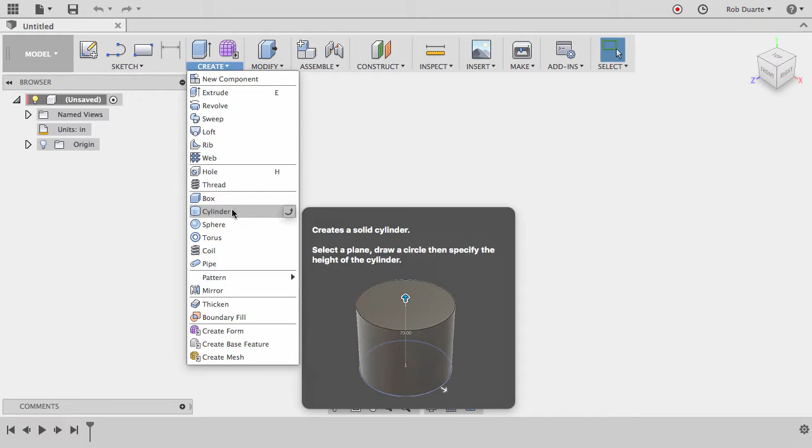So, I think what they were looking for was to see something in here that would create something like a hex rod or hex cylinder. There isn't such a thing, but we would do that using a sketch. So I'll click create sketch here and choose the top work plane. And then there's a command here for creating a circumscribed polygon. So I'll make this polygon 3 inches and I'll hit OK.

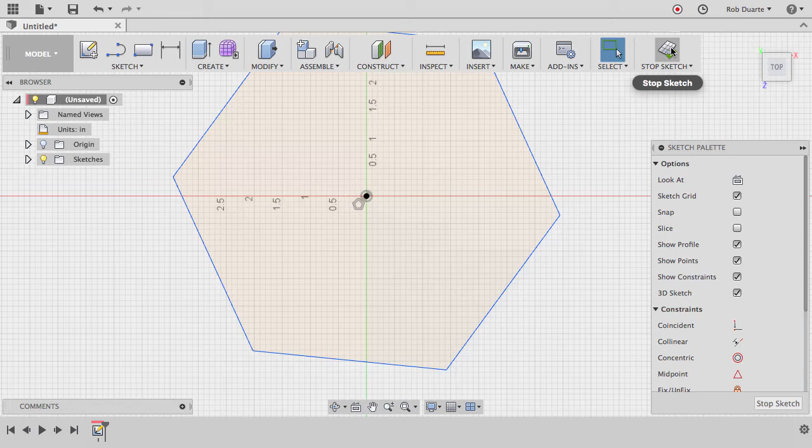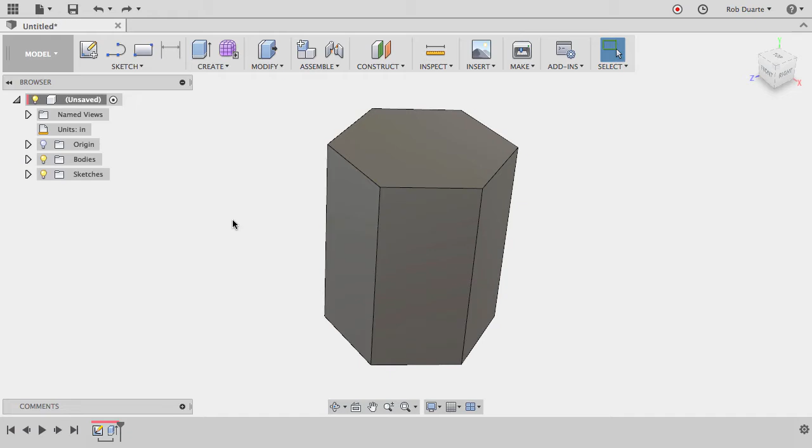And then stop sketch. So at this point, I could just click on it and use either press pull or extrude to pull this up to, let's say, 6 inches or 8 inches. But at this point, there's not a lot I can do. You would think that I might be able to use the move command. I'll hit M and then just choose this face and rotate it, but that doesn't seem to do what we want. So I'll undo. You see it added a move command here, but I'll undo with Command Z. And instead of doing the extrude, I'll undo again.

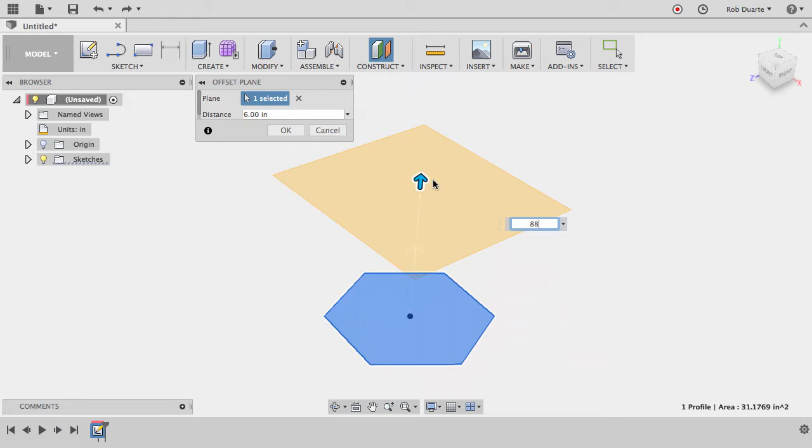And what I'll do is create a second polygon up above and use the loft feature to bridge the gap between those two profiles. So first thing I'll do is create a construction plane and lift it up 8 inches off of that original one. And then I'll create a new sketch on this surface. And I'll use that same circumscribed polygon command. And I'll just make another one that's slightly bigger. So now I've got two here, one above the other.

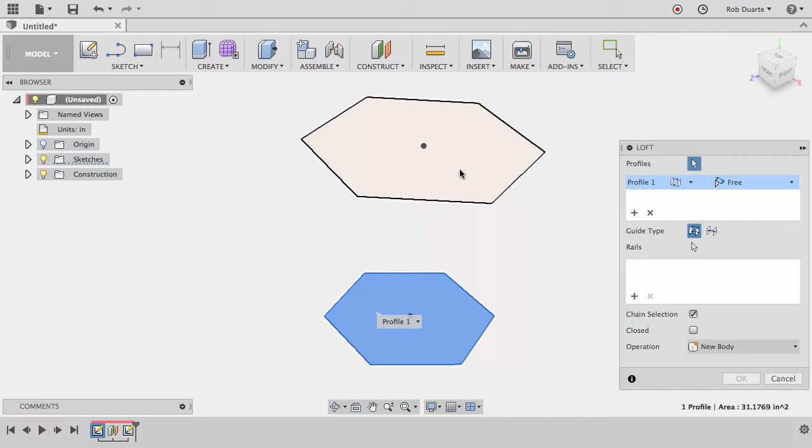The next thing I want to do is try that loft command. So I'll create loft and just tell it I want to go from that profile to that one. And you can see it worked. And in fact, if I edit that top sketch and kind of twist it a little bit, we should see that there's a twist in it now. Instead of going back and editing that sketch blindly, I can't see what effect it's having when I go back in there.

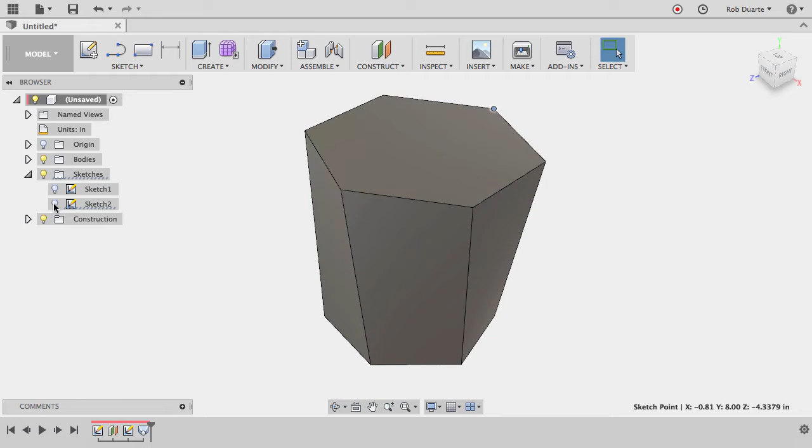Because I'm going back in time before the loft, what I can do is turn on that sketch here and right click on it and choose show dimension. And that way I can actually edit the sketch right from outside of the sketch. So I'm kind of changing its size. I can also twist it. And so this seems to work, except when it gets to a certain point, it doesn't keep twisting. It just kind of is more efficient than that, tries to find the nearest edge. So this doesn't quite work unless you only wanted a slight twist.

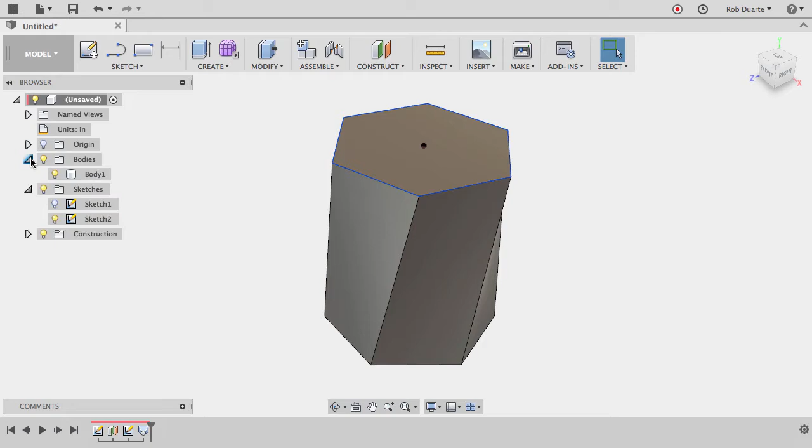So let's go back and try and figure out how we can do this. I'll hide this body for the moment and make sure the sketches are on. And what I'd like to do is use the loft feature, that loft command that we used before, but I also want some rails so that there's a specific relationship between this point here and this point here. And the way that I do that is by creating lines between them.

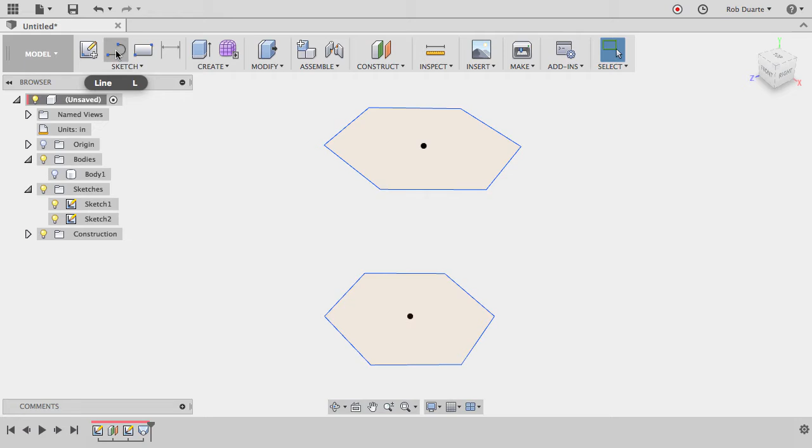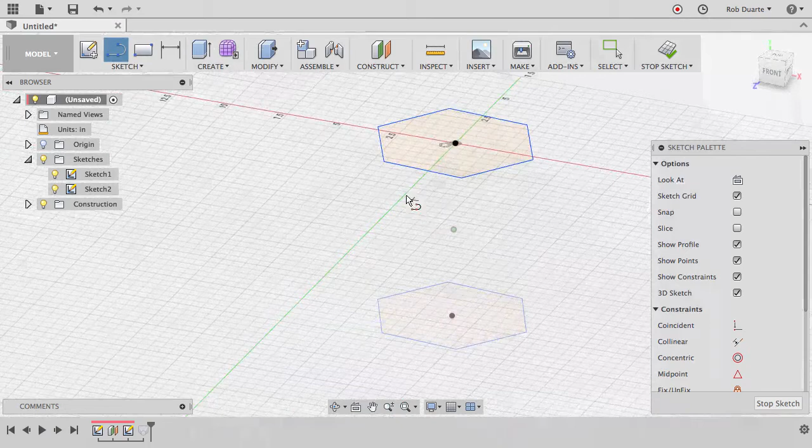I'll choose the line command, and it needs to be within a sketch, and I'll actually put it in this same sketch. I'll click here, and as long as you have in your preferences this feature called Allow 3D Sketching of Lines and Splines, this will work fine. So I'm actually leaving that kind of two-dimensional view of the sketch by just rotating around, and what I'll do is create lines from this point to this point, this point to this point, and so on.

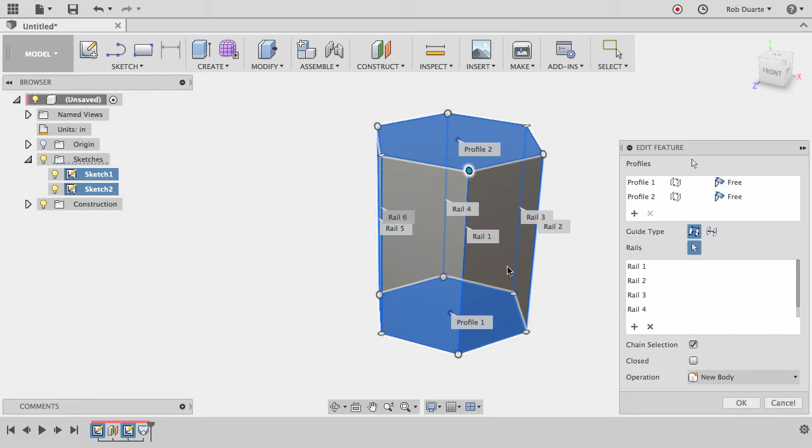Now I can stop the sketch and edit that loft command by double clicking on it, and now I can choose to add some rails. So I'll click on each of those rails. There's the first one, second one, third, fourth, fifth, and sixth. I'll choose OK. And now what we can see is I turn that body back on. As I rotate this top polygon, it's able to keep twisting. Okay, so let's say I've got the twist I want.

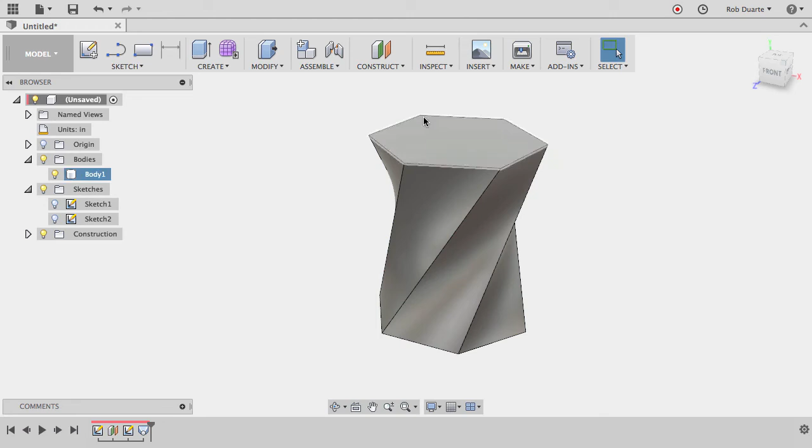I guess the last step would be, because this person who asked the question is a new user, I'll continue to actually make this a vase, which would be to use the modify shell command. And if I just click on that top face, I can say the thickness that I'd like it to be, maybe 0.125 inches, and I'll hit OK, and now I've got a vase. It's open on the top and closed on the bottom.

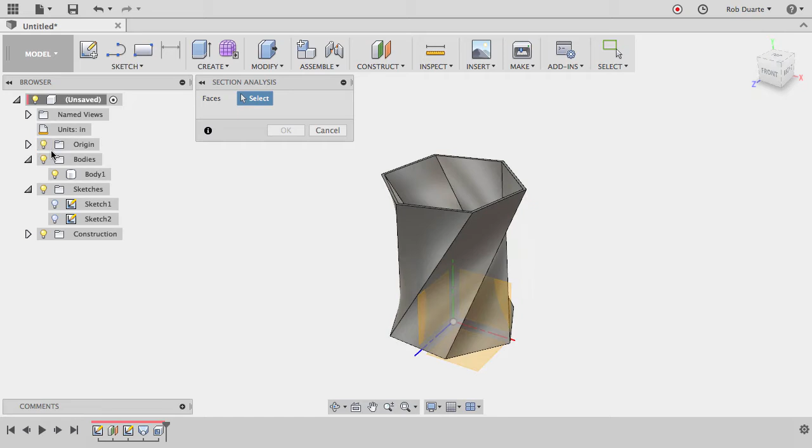I can use the inspect section analysis command, and I'll turn on the origin just so I can select a face here. And then when I hit OK, you can see that it's actually made a hollow vase-like thing.

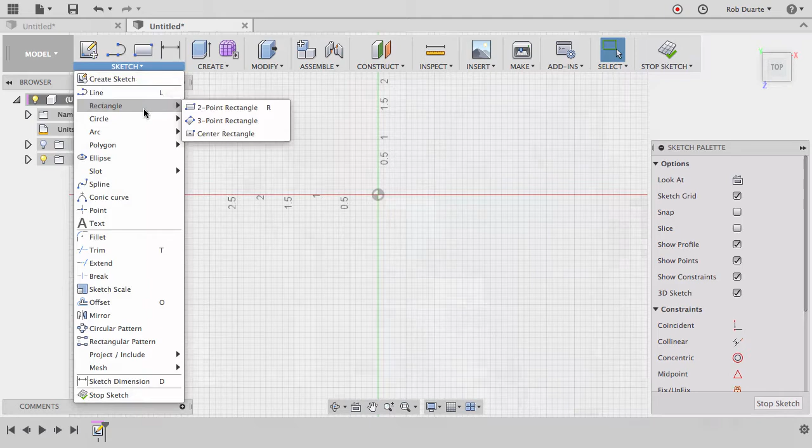Okay, so I've created a new design, and I'm just going to show you how that same thing might happen using the sculpt mode, sculpt workspace. So again, I'll create a polygon in a sketch, and again make that like 3 inches and hit stop sketch.

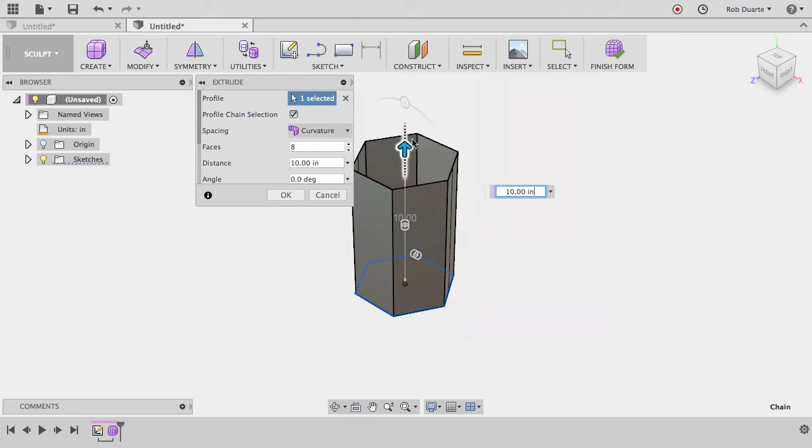Now I'll go into sculpt mode, which I can do by choosing create form here, and I'll extrude in sculpt mode. So if I choose this set of edges and make it go up whatever dimension I want. Let's say it's 10 inches this time, and then hit OK.

You'll see what I've got is basically a similar sort of shape, but it's not actually a solid body. You can see it's a sculpt body here, which is just a bunch of surfaces. I can make it a solid body afterwards, so for now we're working just with surfaces.

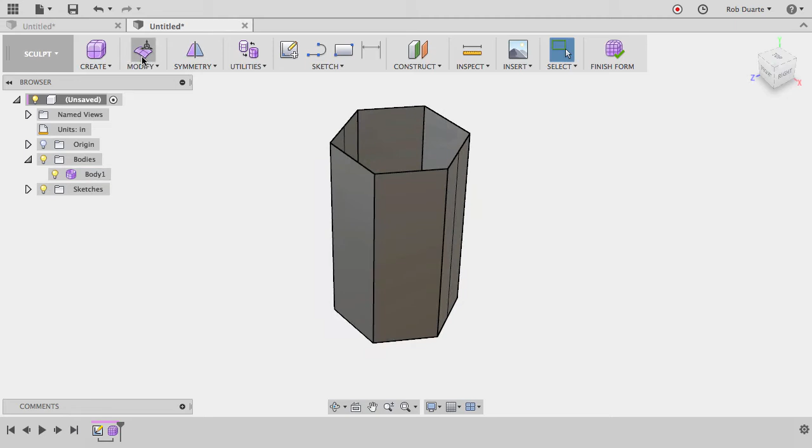So I'll choose edit form here, and what you'll see is that I can actually double click on this edge, as long as we've got edges as our selection filter, and then just twist it. So this works too. And it's twisting in a certain way.

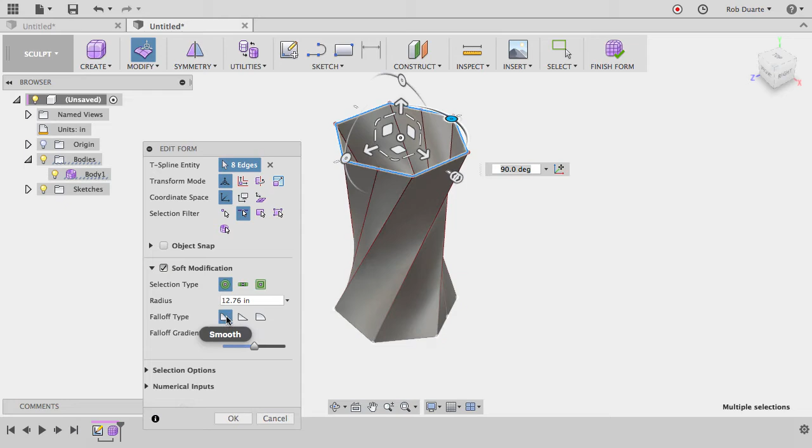You can choose soft modification and change how that works. If I choose linear, there's a different sort of twisting algorithm that it would use, and the same with spherical. And so we can kind of tweak it without even knowing what all of these options are. You can also change the fall off gradient, but for now this is enough information for you to play with.

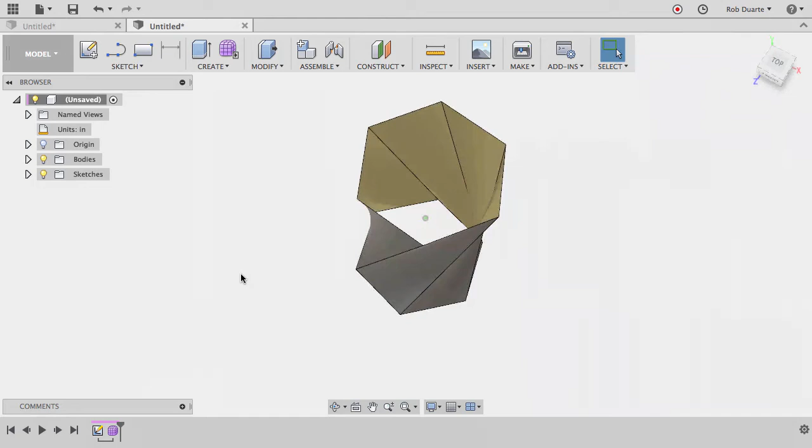I'll hit OK. So now I've got this kind of vase made from faces, but I need it to be a solid thing if I wanted to, say, 3D print it or produce it in real life in any way. So there are a couple ways I can do it. I'll show you one here, which would be to use boundary fill.

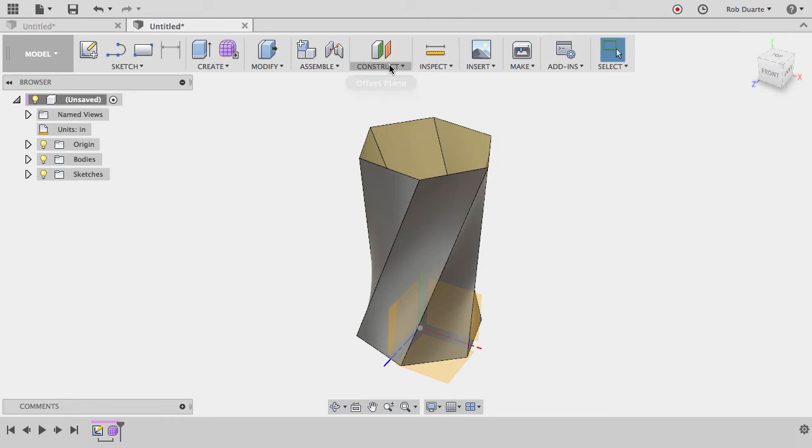So what we need is basically a cap on the top and the bottom of this. We already have a cap for the bottom, which we could use this work plane here, but for the top we'd need another plane. So there are a bunch of different ways I can do this, but I can use an offset plane and say that this is 11 inches away from that one, which is the height that I gave it when I extruded.

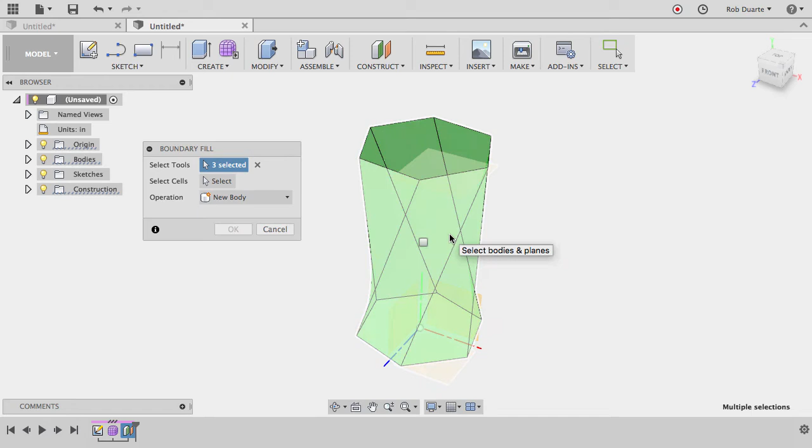I'll hit OK, and now I can go to create, boundary fill, choose this surface and this surface and all of these surfaces as the planes that kind of enclose this 3D space that I want to make, and then I'll choose the checkbox that it gives me, and that is, oh, hold on, let's try that again. Here, here, and here, and then I'll choose the cell in the middle and hit OK, and what it's done is it's created a solid body.

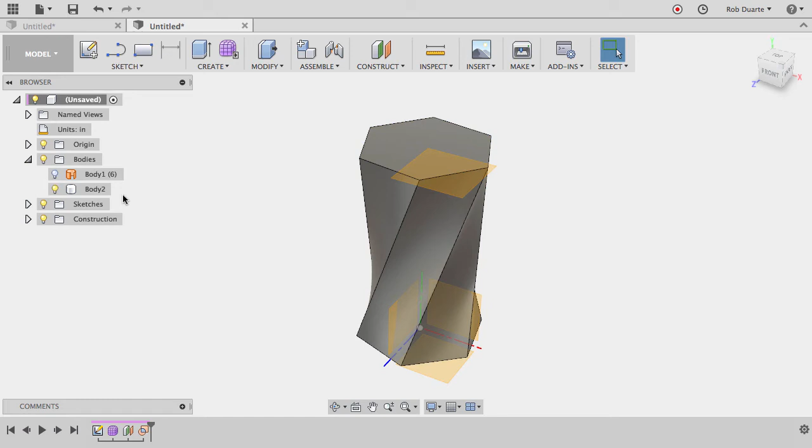Still has the surface body, but I can hide that because I don't need it anymore. Also don't need to see that construction plane or the origin right now. So there's my solid body. And again, I could go to modify shell and do that same thing I did before to create a more vase-like thing.

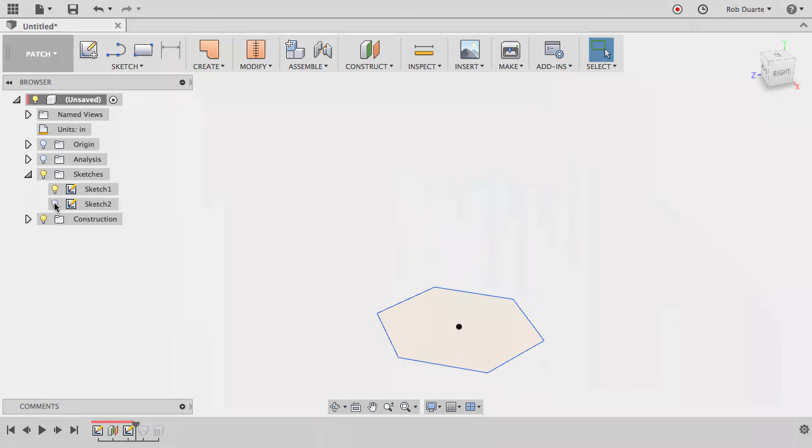So what I've done is I've gone back in time to where I just have the two sketches. I have that original polygon, and then I have the other polygon above with the lines connecting from points here to points on the bottom. And here I'll just do the loft inside the patch workspace instead to show you how it's different.

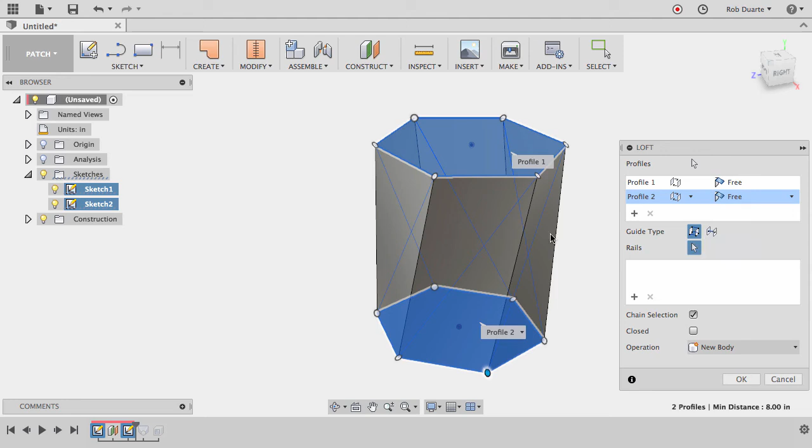So I'll create loft, and then I'll add some profiles, this top profile and the bottom profile. And then for rails, I'll make sure it's set to rails here and not center line. And I'll just click on each of those rails. So there's 1, 2, 3, 4, 5, 6. I've got 6 rails set up, and I'll hit OK.

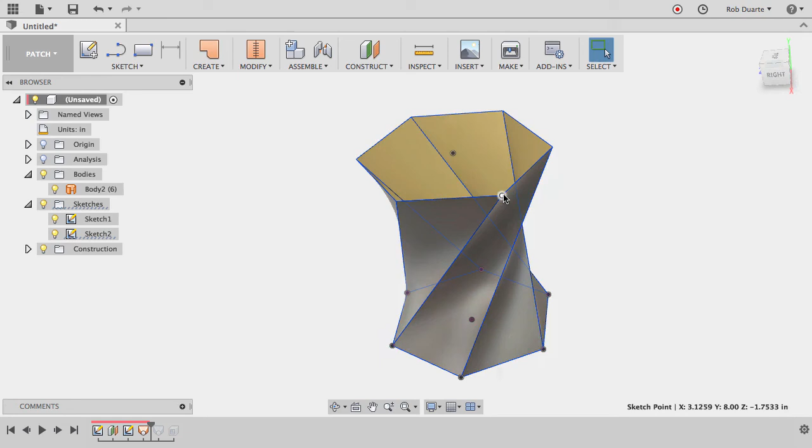And you can see it works just like before. And I can just twist here and it will work like it did in the patch workspace. So the only difference is now, if I hide all the sketches, I can see I've just got a surface body. It's a bunch of surfaces just like it was in the sculpt mode.

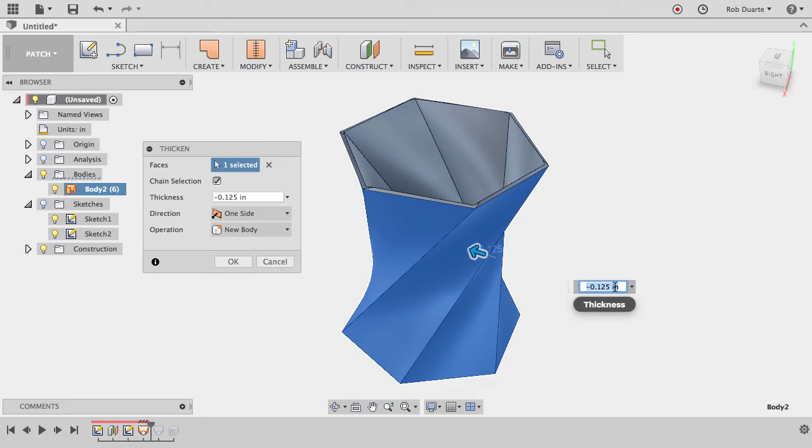So now I can go to create and thicken and just choose these surfaces and give it some thickness. So here it's just negative 0.125. I'll hit OK. And now I've got a solid body. So I didn't add the bottom to it.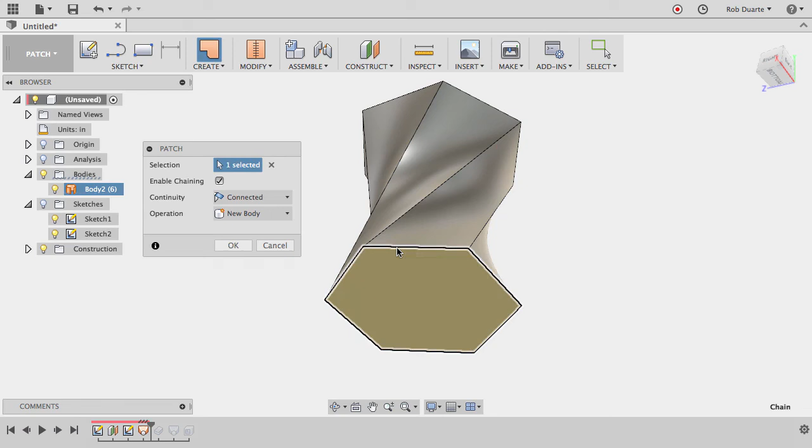So maybe I'll go back in time a little bit to where I just had the surface body, and I'll show you another feature of the patch workspace, which is I can create a patch for the bottom, and as long as I click that ring of edges and hit OK, it's now created 2 separate surface bodies. There's one for the outside and then one for the bottom.

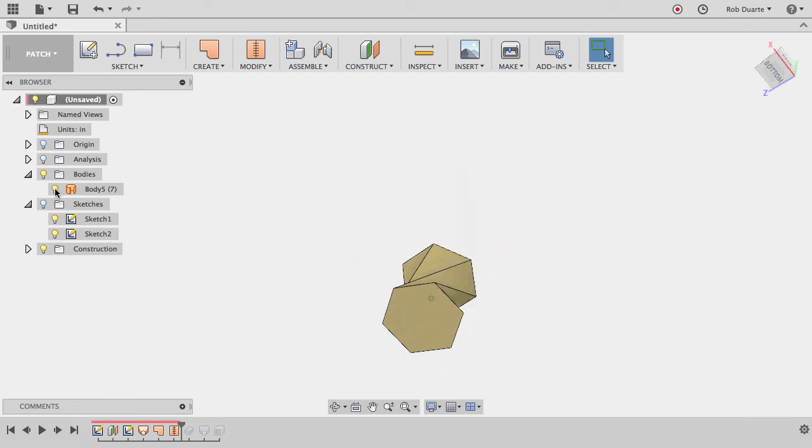So what I'd want to do at this point is stitch them all together. I'll highlight them all and choose the stitch command. Say OK, and now I've got one single surface body that's got a top missing, bottom is there, and at this point I think I'd probably want to do the thicken. So create, thicken, and choose all of those faces.

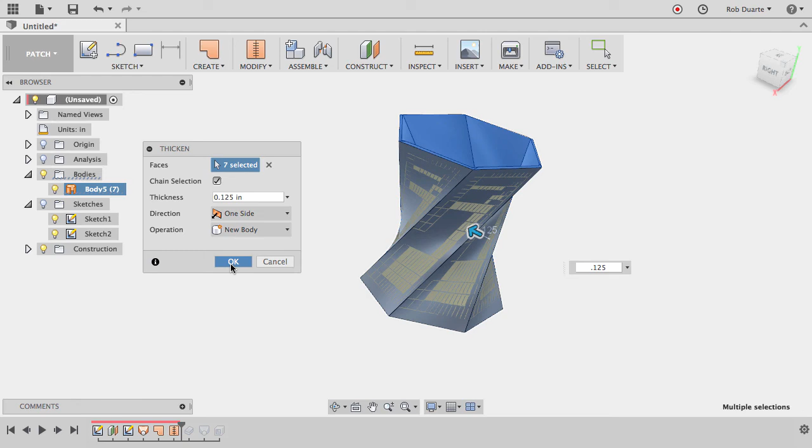I'll choose OK, and what I should get is a solid body now, and I'll still have my surface body remaining. So here's the solid body. If I hide it, I can see there's a surface body that was used to make it. So now I've got a vase. I'm not sure about it. I can turn my analysis back on, and there we've got something that looks like a vase again.

So there's 3 different workspaces that you could do this in. You could do it all in the model workspace. You could use T-splines to have more control about how the twist happens, or you can work with surfaces in the patch workspace. Lots of ways to do this. There's probably other ways that I'm not showing you, but there's some ideas to get you started.